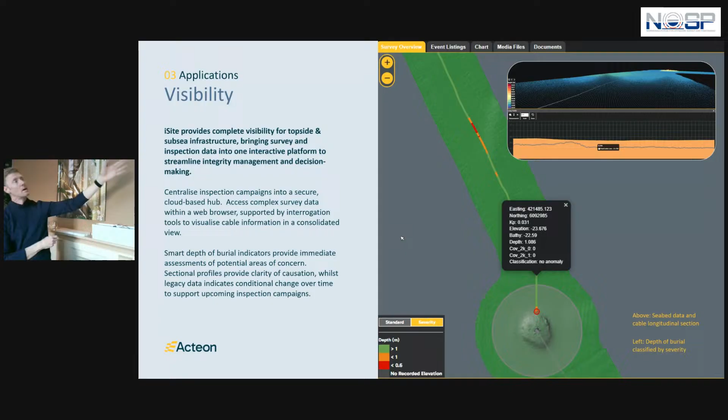So we've got the inter-array cable obviously below the seabed, although it's not easy to see that on this particular screen. We've decided to take a longitudinal cross-section through the cable in the same way that you would do with charting. This is almost like an interactive chart, and you can see there the profile of the cable, and where I've zoomed in.

Particularly to the left of that little black box there, you'll see that this is not a seabed issue. This is not a scour issue. The seabed is not eroding away. The cable's actually been installed probably wrong to start with. Either the trenches didn't go right, or they hit boulders or rocks or something. The 300mm cover that they've got here is actually to do with that.

So we have that information that's extremely useful. And then obviously when we survey that year on year, we can monitor and compare the multi-beam from one year to the multi-beam from the other year and see if scour is affecting things, obviously around the legs of the jacket, the offshore substation.

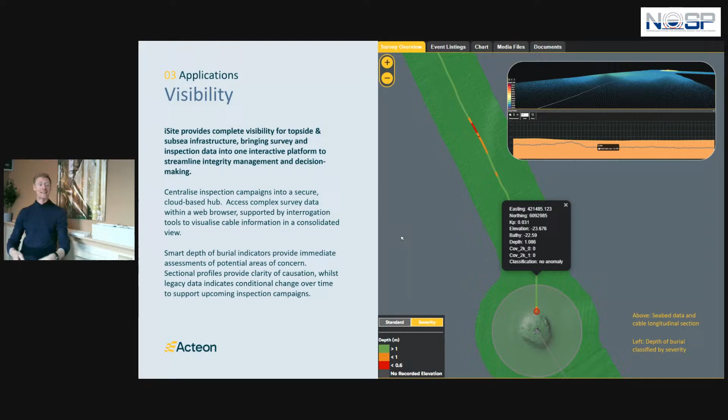We would expect to see scour around there. Hopefully the rock dumps are performing as they should be around the base of the monopiles, but you get to see all of that, and you don't get to see all that in a report as an end user. You just get to go in and look at it yourself, and that's the whole idea of what we're trying to do with the technology.

And then the media data, we talked about ROV data, and I'm not going to labour this too much because this does appear in my video, this very same example of a pipeline crossing.

But simply put, we want to be able to connect information together. The whole idea of a digital twin in its most simplest form is that you're going to have lots of data, listings, multi-beam data, videos - you're going to have all this information, and it's all separate, disparate, all on a hard drive in separate folders, and it's not connected in any way. All we're doing is connecting the dots together.

So if you want to have a look at a pipeline crossing in a specific area, all of the data is there for you to make that informed decision. You don't need to find which hard drive the ROV data is in and which of these 3-hour data sets you need to go to find what you're looking for. We're just driving the information and putting it together to make it far, far easier for you to find things.

And then it makes it easier with the reporting as well, because in the offshore wind example I gave you before, every 24 hours they're reporting back to us onshore just using Starlink on the ROV inspection campaign. We're pulling in data every 24 hours, feeding it directly into the system.

We're getting the media photography for the anomalies and things like that. And we're able to provide the client with immediate feedback to any red flags or any anomalies within 24 hours through the portal. So everything's basically being collated, QC'd, and then issued in near real time. And that's the beauty of using the cloud, as long as you've obviously got a half decent Starlink connection to do that.

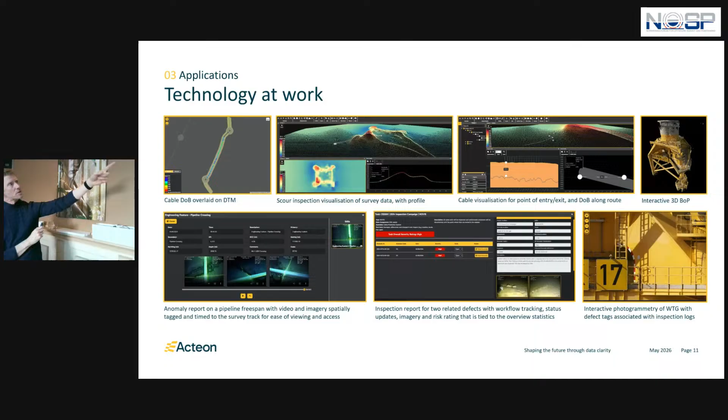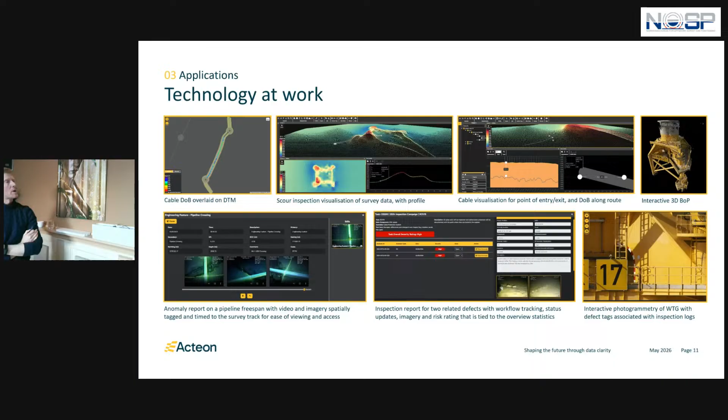I've got some examples here. Obviously, I've got the video file. As I say, we kind of operate above and below the waterline, and you can see examples there of cross sections we've done around the offshore substations and the jackets and various other things, and the above water of the jacket on the offshore wind from that point of view. So lots of ways we can use the technology when we're looking at the subsea application rather than the topside digital twin.

And then I have this video, doing okay for time, 5 minutes, and this is me. So what we've got here is GIS. I've got a construction support project off Brazil, and we get the entire field, so we can look at the entire field. This is a crazy ass field, FPSOs tied into massive pipelines.

Semi-traditionally, you have your folder structure of all of the data. So this is getting rid of the hard drive now. You can just go in, download whatever you want. That's all there. We're not going to get rid of that because contractually everyone's going to ask for that. We can't reinvent the wheel.

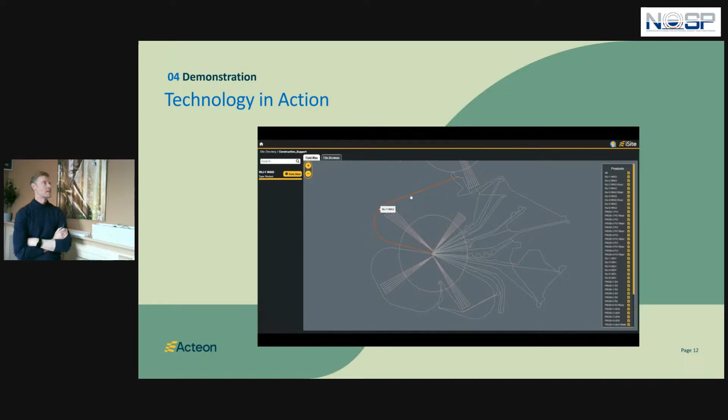But what we'd love to do is this, which is to say, well, let's have a look at this pipeline here, and let's have a look at it in more detail. What survey activities have been undertaken on this particular pipeline? So there's been 3 campaigns: pre-lay, as-laid, and as-built. We've got all that information in here.

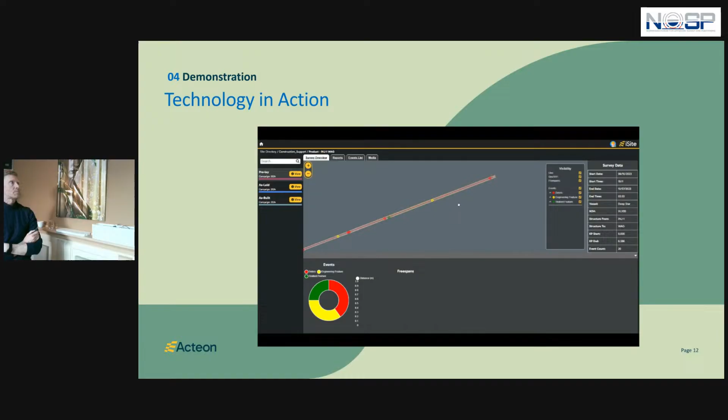We start on the pre-lay here. And what we'll do is we've got the multi-beam data, because this was a prelay multi-beam. So we've got the geotiff in this case of the survey route. We've got the design position of the pipeline, and we've got a few listings. The little dots basically are anything that we've hit in the listings.

So the reports are in here, so we can issue reports through the system as mentioned before. And then obviously the event listing. This is a small listing just because it was prelay. But it's all in here, and rather than being a spreadsheet, it's all interactive basically. So you can filter to all of your boulders if you want to, or any engineering features that you want to. It's just an interactive way of doing the same thing.

So by clicking on anything in the prelay, you get the data that you would normally get on your listings, but you also get the media files. In this case, it was static photography tied in to that particular event. So again, you're not hunting around for one thing, because one thing's connected to another.

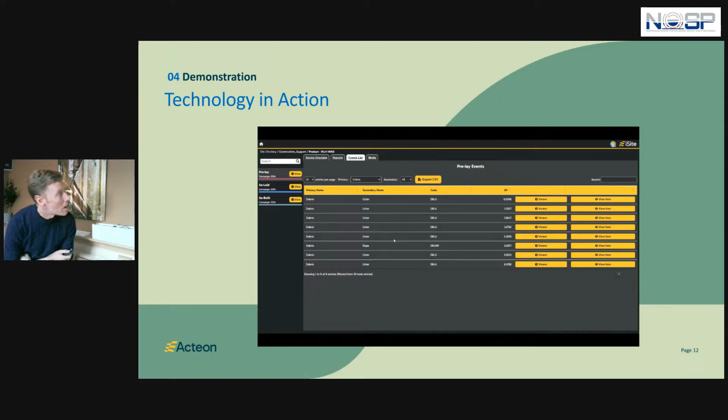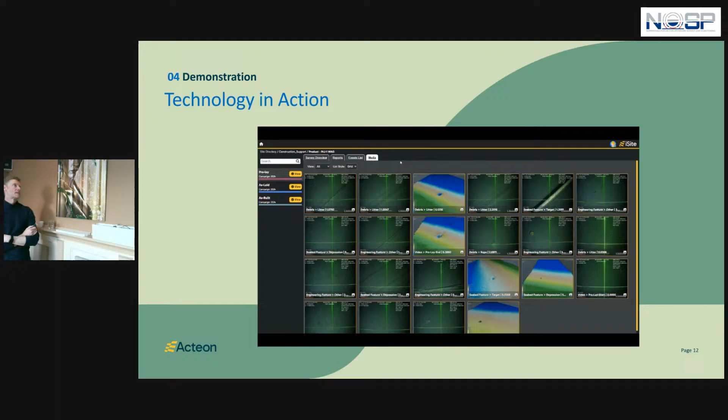And in this other example, I'm just filtering to debris and doing the same thing. So it just becomes this kind of nice interactive way of looking and connecting some data together, which is useful from that point of view. And in this case, as I say, all the stills are in the media folder that you can kind of click on as you wish.

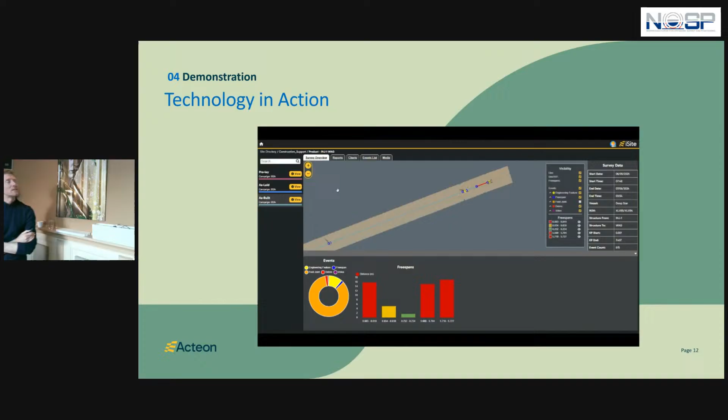A more interesting part of this data set is the as built. So you can see when it goes as built, things get a bit more exciting, because we get subsea structures, we get free spans, which is red there, as you can see going into the structure. We get pipeline crossings. So you can see there between the two blue dots, which is obviously free span start and free span end. We get pipeline crossing, which is the middle yellow one, as I'm highlighting there. You can see statistically we can show anything that we want.

When I go into the information on the pipeline crossing, this time we had ROV video. So as mentioned before, I hit play and I'm already teed up on the video, 3 channels, just playing the pipeline crossing, ready to go from that point of view. So again, it's just about bringing the information together and making it far more accessible from that point of view.

This is a complete screen record of what I did. This is real time on the cloud. There's no kind of speeding up or anything like that. And we've got a bit of a dodgy connection in the office at the moment. You can kind of scrub through. It's just there. The information is there, and you can kind of then decide to kind of replay it back and go back to where you started.

It's just driving informed decisions, and the feedback that we're getting from the operators is that they want to see more information where they can compare data over time. As I say, bring in the multi-beam from one year and another year and look at how that looks, or if they want to tie into their anomaly systems, their management systems for the anomalies, bring that data in, see how that correlates, see how that helps them plan the next campaign for the next year.

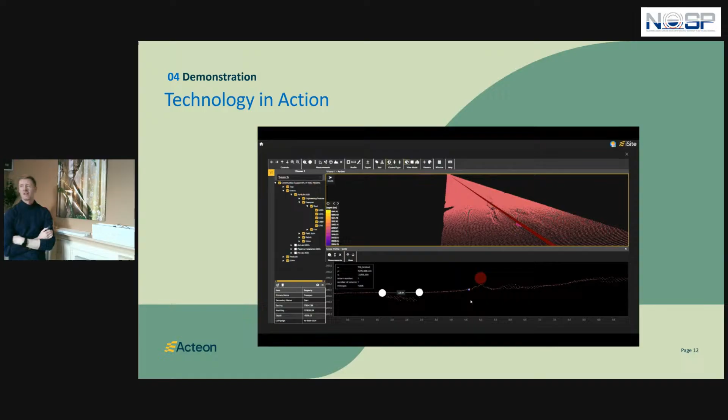But this is all done in the internet browser through Microsoft Edge or whatever you want, so we're not talking specialist software, and that's the key to what we're trying to do here. We're just trying to make the data accessible to all from that point of view.

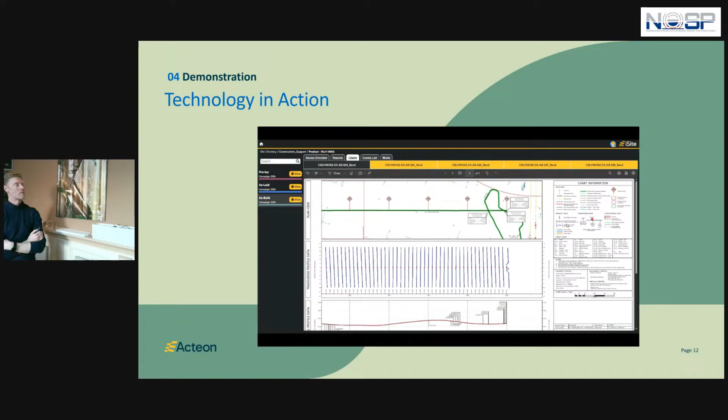So I think that covers off most of the data here. I'm going to show you reports which you've already seen. All the charts are in here, so there's nothing that isn't in here. It's just a different way of displaying the information, I guess, from that point of view.

The event listings are obviously more complicated because there's a lot more of them, but that makes no difference. And then the media files, you can toggle between still images and video files. You're just back to choosing the video file if you knew which one you were looking for, and you can find it, scrub along, and do it the old way from that point of view. There's no problem with that.

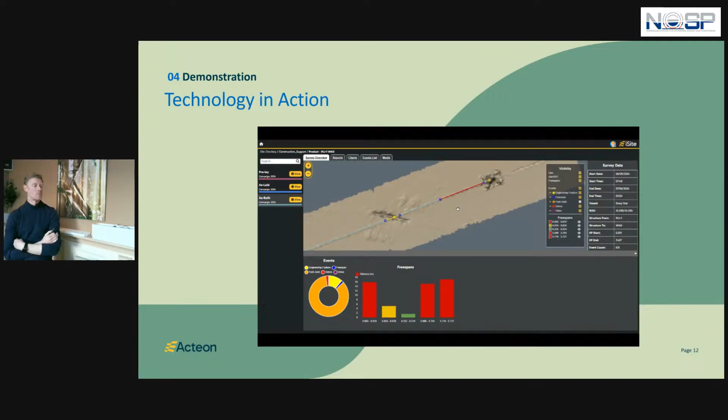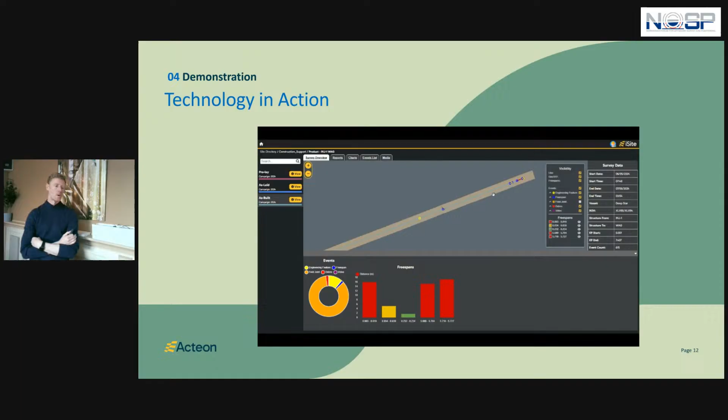I think it's interesting. As I say, we're working with a few operators on the subsea side of things at the moment, because a lot of the data they're managing is database driven. It's not visual, if you know what I mean. So they're using the reports and the listings to understand if free spans are getting worse year to year, and if that's exceeding engineering tolerances.

But they're more interested now in looking at what is the effect of scour, and what three-dimensional view can I take on this. The technology there and the quotes are obviously more on the top side than subsea, but it obviously works, if you know where your data is to start with, and you don't need to capture it again or retrieve it, because that costs a huge amount of money, never mind anything in between. But apart from that, that's really what we're trying to do here at Acteon with our iSite technology.

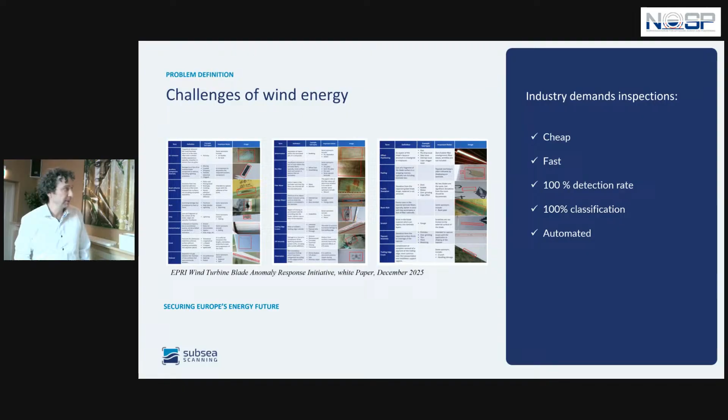We at Subsea Scanning believe that no single sensor could answer this call, so we decided to combine various sensors to achieve that. We believe most of all in optical sensors because they are non-destructive, very fast, and very accurate. You have a high potential for optimization, and if you use different types of cameras, you can digitize different types of material properties. So if need be, we can deliver real-time results.

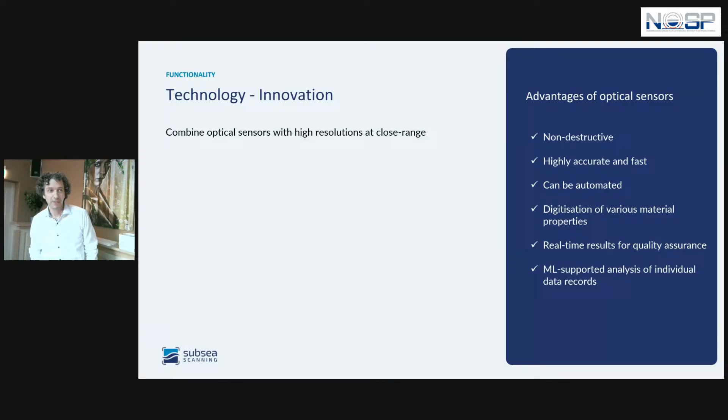And of course, machine learning supports very well image analysis. That's nothing new. We'll see if we get there. So we do what everybody would probably start with.

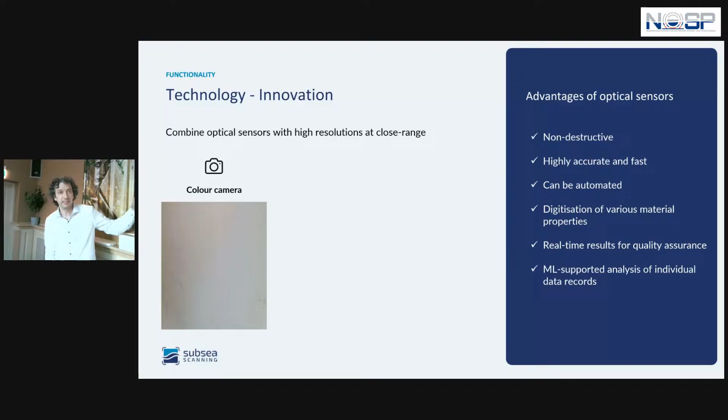We take a color image. We take a drone, fly quite close to these rotor blades, about 3 meters distance, and take high resolution images. As you can see in this example, this is actually a specimen I had in my office, 80 by 60 centimeters in size, just a small fraction of a rotor blade. As you can see, there's not so much to see, so just a color camera can't be a proper response to this call.

So we decided to employ also thermal imaging. This is the same specimen, the same site. We've heated it for a few minutes and then took a thermal image from close range. And you can see, that gives us a completely different picture, right? We can actually see the heat dissipation. We can see what's going on in the underlying structure.

So, entirely different scenario. Last but not least, and this is where most of our time and efforts go to, is 3D scanning. You can see here a 3D point cloud of the same specimen. I can play this so you get a better impression. The 3D scanner, the one you're seeing down here, delivers a point resolution or point distance of 1 millimeter, so every millimeter on that specimen gives you a single 3D point.

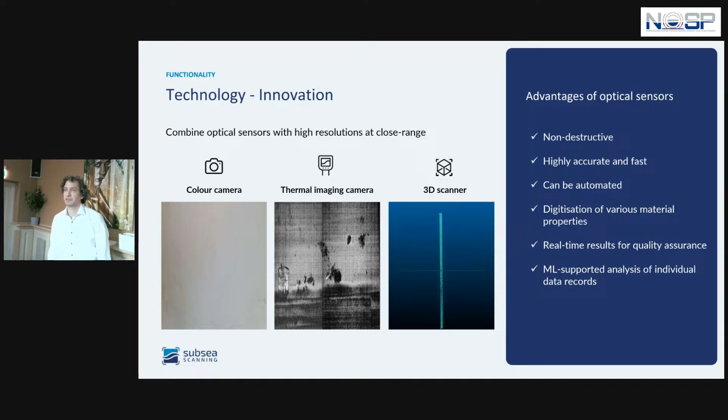And the magic really starts on the next slide, achieved by getting this data in a synchronous way. So we have a geometric overlap, and all 3 data sets are aligned and correctly scaled. We achieve that through co-registration during the calibration process. At the bottom, we have this 3D point cloud, and then we map the colors and the thermal data on top of it.

And now we're talking. Now, all of a sudden, we have the correct geometry and correct scaling, and what happens is that these defects lie on top of each other, and you can actually analyze this triple data set across thermal, RGB, and 3D point cloud. This gives us new ways to classify and validate our classification results. You have a hotspot somewhere, and then you check all 3 data sets at the exact same position and location, and see if there's something suspicious in the thermal data. What does the geometry say? What does the point cloud say at this area? What does the RGB say? So this helps us a lot.

The field of view we cover is about 1 square meter from a 3 meter distance we are recording, and I already mentioned 1 millimeter point distance. The type of scanner we have built and designed is based on a concept called stereophotogrammetry.

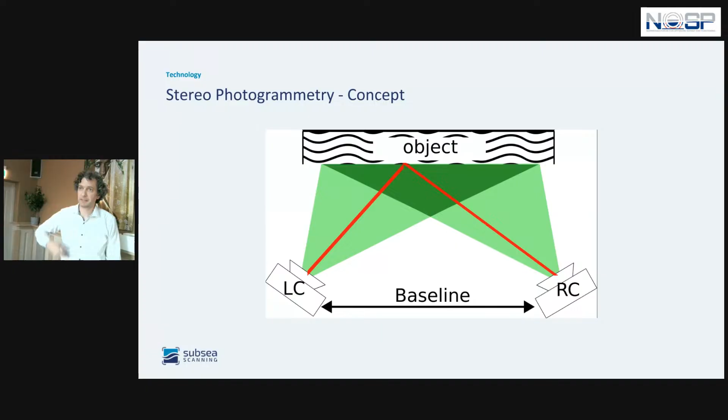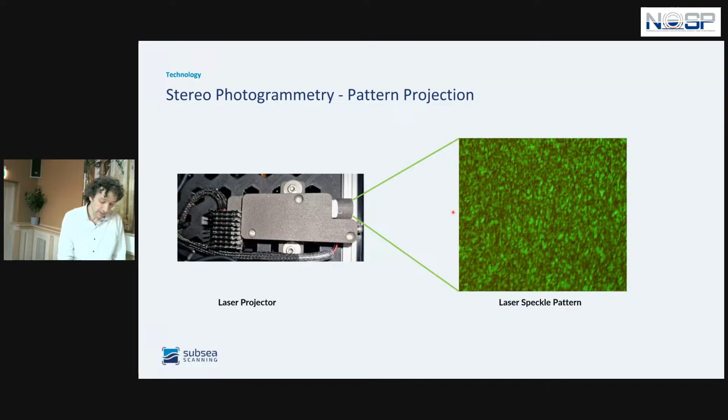Yeah, some people are still nodding. Good enough. Okay, and that helps us how? Well, it helps us because we don't have to pick any more from a million potential corresponding candidates. We only have to pick from about 1,000 potential candidates, because we know the correspondence is on the same height, right? That limits our search window drastically.

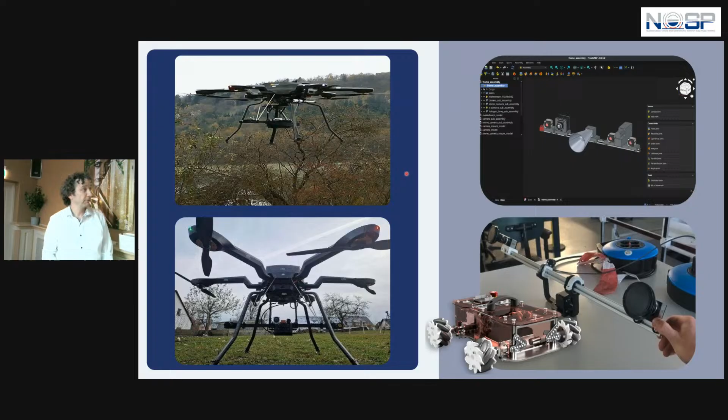This project phase is actually co-financed by Rogaland Fylkeskommune. We are very grateful for their contribution. Our scope is basically to build a new sensor housing, which we just have. The sensor can now be battery powered.

We have developed a new calibration board for the thermal camera, and we are just kicking off a new development for a new projector, which is even brighter and allows us to scan faster. This one here can scan about 10 times per second, which causes about 1 terabyte of data within 10 minutes.

When it comes to software development, we are a tiny bit behind schedule, but we are currently automating data storage and automating data processing. Obviously, with 1 terabyte in 10 minutes, you don't want to do that manually. You need a fully automated pipeline, down to visualizing the point cloud also on the web.

Next steps will be a machine learning-based parameterization of the sensor, so we don't have a field operator anymore who manually checks that the cameras are working and makes sure the exposure time is correct. This shall be handled by an online model, basically.

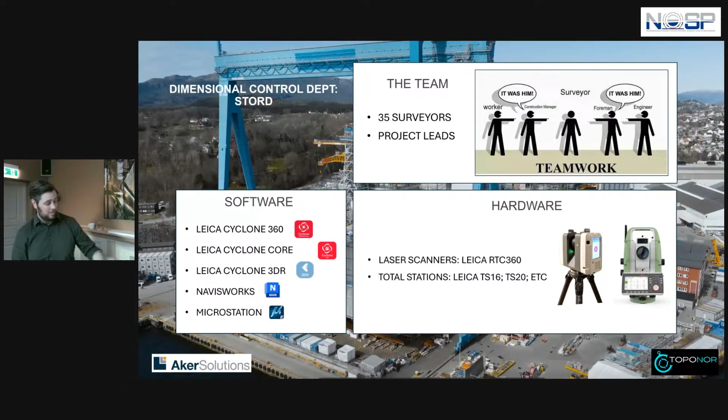A little bit on the yard itself. On the left here you see Hugin A, and this small tiny bit on the right side there you have Valhall. On Stord we have around 10,000 people right now, so it's a big company with a lot happening - a lot of people, a lot of disciplines to take care of, and a lot of challenges for us surveyors, as all of you probably know a little bit.

Then we have another picture on sail away of Fenris topside and the Hugin B jacket. Yes, I took that from the internet, you can just skip that part.

So the topside is supposed to weigh around 27,900 tons. Overall it's 142 meters, the length of the mainframe is 90 meters, the height of the platform is 55 meters, the firewall is 45, and overall width 70 meters excluding flare.

Main assembly yard is Aker Solutions Stord, but we had different companies or different yards in Poland, Finland, Dubai, Sandnessjøen, Egersund, Verdal, a lot of places in the world. And it's my job to try to get every piece to fit together - that's a really big challenge.

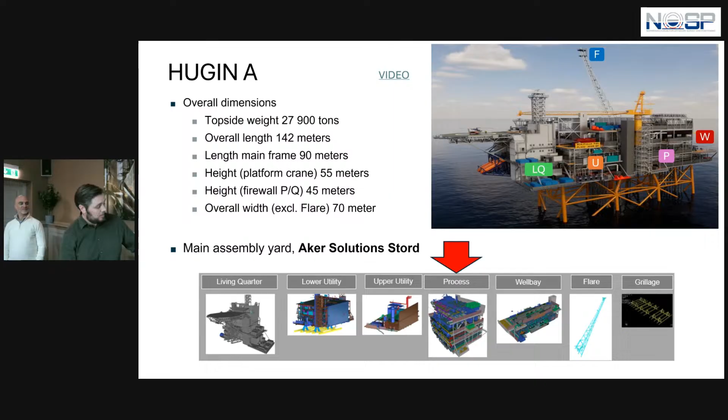So we start with the process - that's been kind of the main focus on Stord itself. A little bit on the way the platform is divided into modules, and I would say around 3 times this room for each and every module.

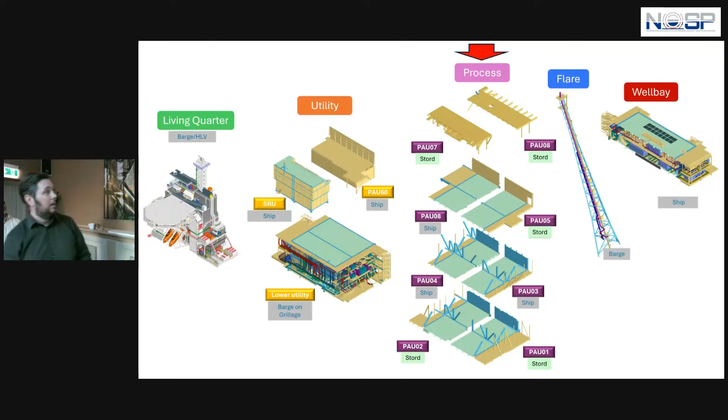Then we have all these other parts - lower utility, that was on Egersund. SRU, that was actually in Batam, Indonesia. Wellbay was in Dubai. Then we have PAU60, that was in Poland. PAU 4 and 3 and 8 was in Poland. Then we have the living quarter, that was in Leirvik, nearby us actually. And then we have the flare in Sandnessjøen, of course.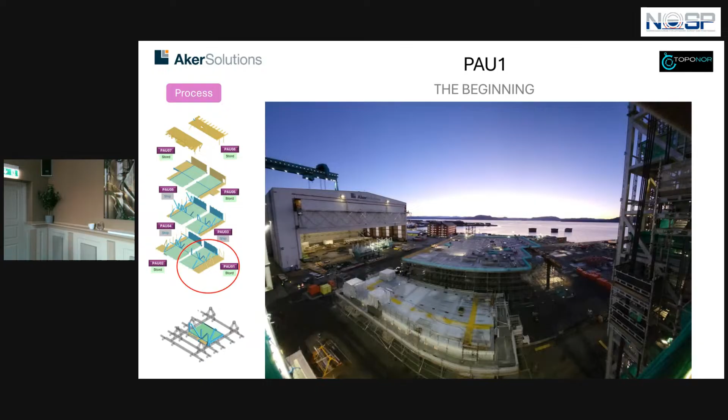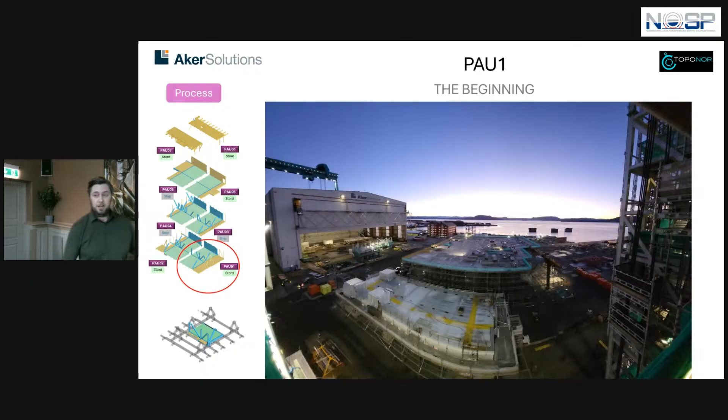So what you see here, let me just walk over - this is the area where we're going to place the hooking rig. This is something else - we did a scan of the scaffold itself to check for clashes, to see if everything was ready. Didn't think I would find much, but we actually did find something - there were some small pallets, so it was easy to remove.

This is a kind of simulation we use in between the poles. So after lifting PAU1, that was in place, we had PAU2 just on the side. This was actually PAU3 on top of PAU1 - it was a simulation, scan versus scan, and we used the scan to create this kind of simulation between it, then of course did a clash check. My big challenge is we have a huge scope.

We have pipers, we have welders, we have insulation, we have painters and everything. Everyone is building each and everyone's scaffold, putting up tents, putting up stuff together, everything. And I have to deal with everything.

Then I get one date - okay, that's the day we are going to lift. Okay, when will I be able to go under to scan it? One day before. No, I need at least 5 days, I said the first time. Sorry, we cannot do that, you will have 2 days. Can I at least have 3 days? No, you have 2 days.

So that was basically the standard for us. You have to do the full clash check, the simulation and everything. So you have to capture the data, work around the piping, work around the scaffolds, work around the painters. You have to get all the scaffold removed and everything, and then do the full simulation and the full clash check.

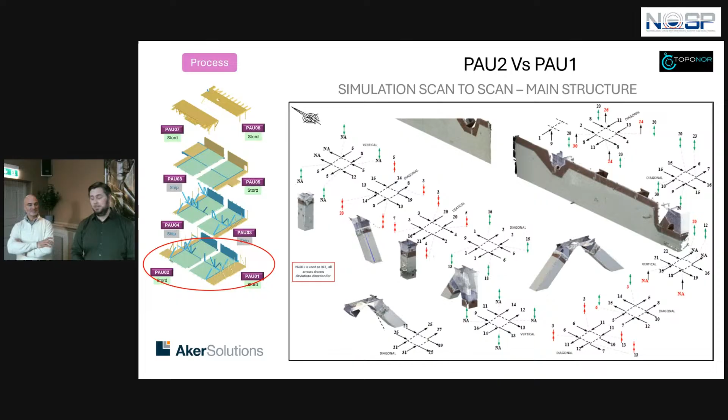That's a really hard task to do, it demands a lot of planning. That's where Ricardo was my wingman on this one, because I needed to plan - okay, what do we need removed? How can we do this? So that was kind of my big job, to figure out what I need to be able to do this task. Then I get Ricardo to do the actual task, together with me and another team, of course.

So just another example of a simulation that we did, and this is how it looks. Up in the top here, you see the underside of one PAU, full of supports, full of pipes, sometimes scaffold hanging with it. And then you have the top side, and you're going to thread that down to this somehow. So you have a lot of scans, a lot of things you have to deal with, a lot of things you have to detect before you have to be there with the lifters.

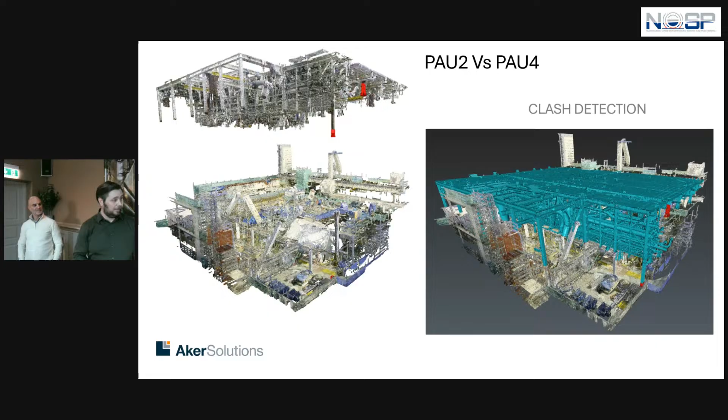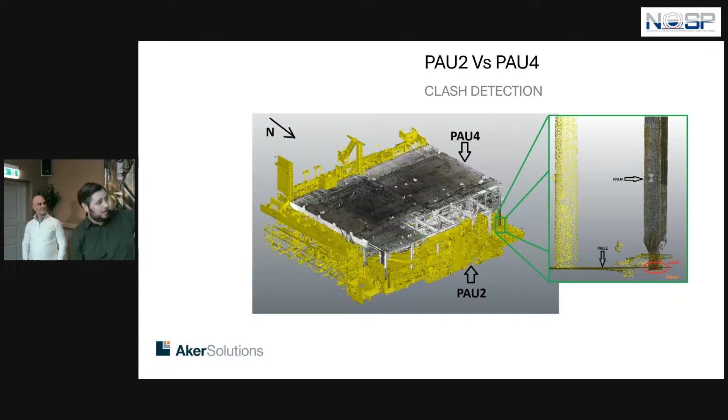That's why we have 2 days, and the welders that are going to cut everything are running all night long before the lifting. This was PAU4 on PAU2, and this is an example of the clashes that we found - for instance, a beam sticking down there. And I'll run through a little bit more.

On the lifting, everything was evenly supported, so everything was good while we built it. But when we lift it, how will it look? When we drop it down, how will it look? It will probably be different, right? So we need to figure out, okay, how does it look? And then we have to try to estimate, will this actually fit or will it not?

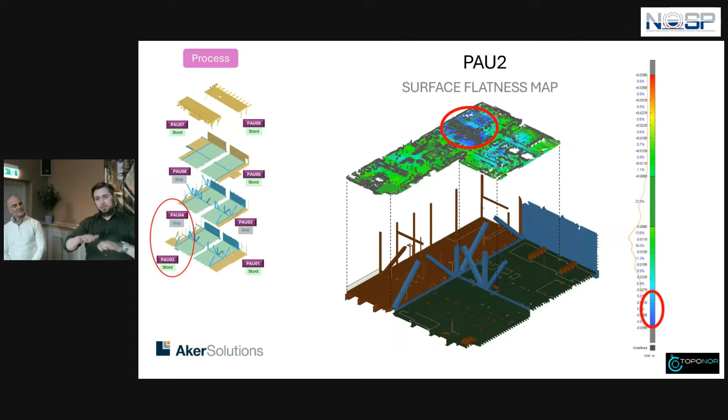And do we expect some clashes there? Especially on the wing decks, the red part there, that was just falling off. So, yeah, and they believe everything is straight. It's still, of course, it's straight - no, it's steel, and it's heavy, it goes down. And then you see in the middle, on the flatness map, you see that it's different all the way. The walls and everything, you have small gaps in the middle, like so.

Nothing is even. Yeah, if I can add there, just so you guys understand the size of this - every single element of that weighs between 400 to 500 tons, right? So when you start packing up this to build a platform, the floor and the whole thing starts to sink down, right?

Then we have to, in addition to check the position and to check the clashes, what they're gonna have when they lift it down, we also have to check what's gonna happen after it's lifted down. So that's a quick evaluation to see the floor after the lowering down.

This was actually PAU4 versus PAU3, and PAU4.

Yeah, it depends on what was the reason they asked for it specifically. So in this one, I think they believed the wing decks are falling down a little bit, so we believed the pipes will not fit as it is drawn in the model. So then we can show them, okay, the whole floor is a little bit down, which means you have a support, almost like this tripod, and the pipes are going on top of that one.

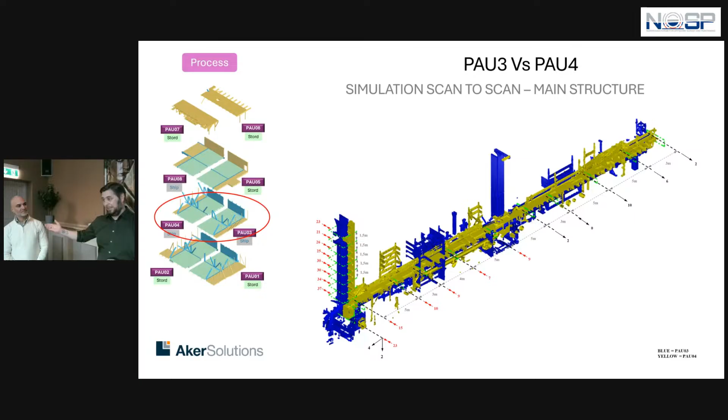I need to mention the red arrows. It's okay, not a bad thing, because some of the section is delivered with overlay. Yeah, so it's quite normal.

Some kind of overlay, maybe. You never know. In this case, we had some temporary beams that were supposed to support the whole bow up when we lifted it up. And then we saw on the bottom, it was a little bit sticking down. So that was one kind of clash.

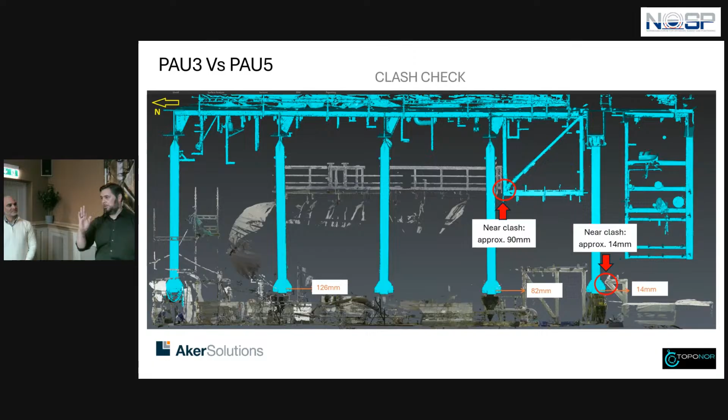And this was a little bit moved because it's hanging on one small thin plate, so it was dangling like this basically. During the lifting, you saw the beam was standing like this. So we discovered that this does not look good, but we can move it, so that's good. But the clash on the bottom, that one we needed to remove, so that one was cut.

This is just an example. Here we have another example on the simulation itself.

And then, how can we give a good view on where the guys can find the clashes? I had one idea, Ricardo had his idea, and we worked with someone on the method. They had their idea. This was kind of my way of trying to solve that one. So I will go over and explain.

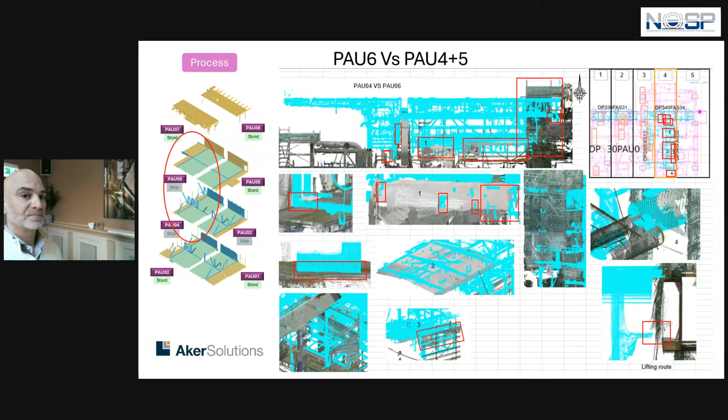So I divide the whole section, this is from top view, into 5 zones. Right now I'm working in zone 4. Then I take a front view of it, and I mark the elevations and the location with a number, and I put the number here. So I show the actual clash and the number so they can locate it both in top view and in front view. That way, I think you can easily find, okay, I need to go exactly there.

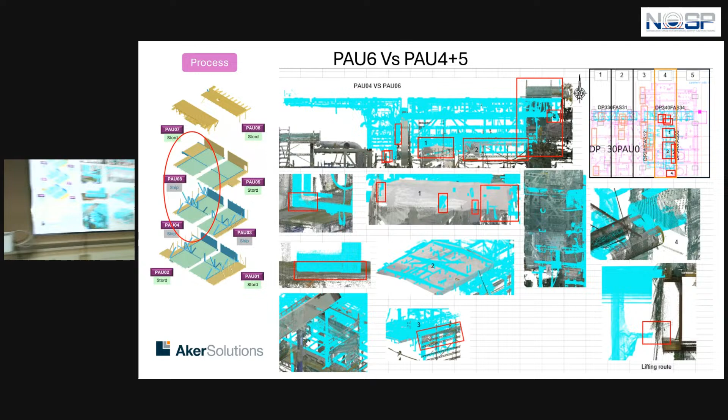Quicker to actually find the thing that is clashing and cut it. That was just one way to do it. But we had to work together, all 3 of us, and put in everything together.

So when I was done with the simulation, I also worked with the clash check. That's kind of the things we can find in the clash check. Here's an example: it was a support on a tank. If you just put this one down, then the tank's isolation was penetrated, so we could not have that support there. That's what this clash check is showing.

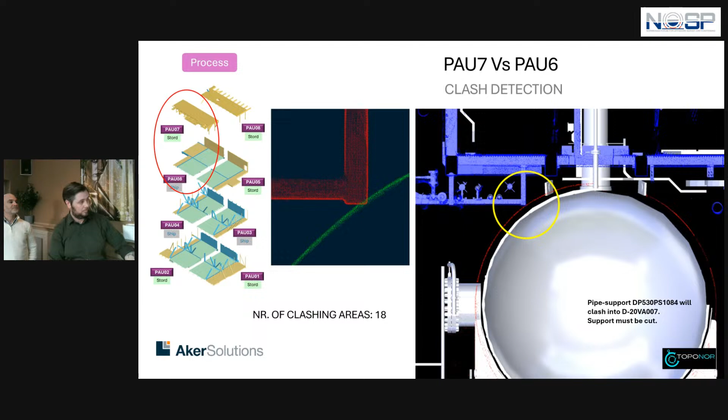By the way, a detail on that - could you go back, maybe? The number of clashing areas is 18 in this specific example. So what we show is just one example, so you understand what a clash is. But for each area, we would find between 5 to 20 clashes.

And if we don't do this work up front, the typical situation in these big constructions is that the crane lifts these 600-700 ton masses, and they go down until it hits something. Then it has to stay there while guys try to cut stuff, spending hours and even days. This delays the project - you have thousands and thousands of people on hold waiting for this to be resolved, on hold with the crane, which cannot do anything else because it has 700 tons, and the crane is very expensive.

And Valhall is probably waiting for this section to go down so they can start on their lift. So then you are actually affecting Valhall as well, which is why it was so important to actually reach those demands and reach those dates.

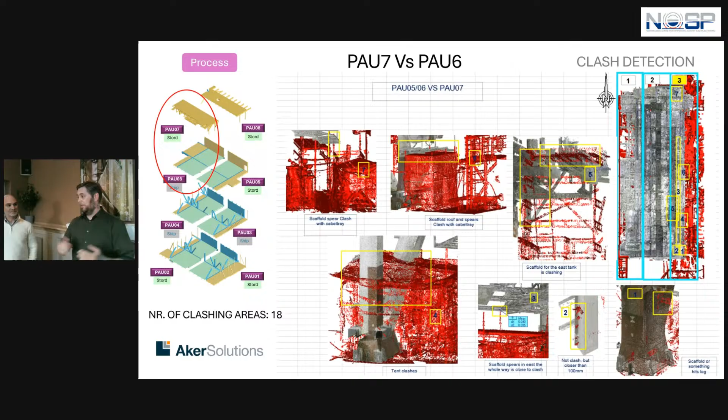You see that everything is built around where the colored one is coming down in the middle here. You have a big support coming down, and you see there is a lot of stuff here. If I don't recall wrong, this was 10 hours before the lifting - that's how close to the lifting we were delivering that one. They have to run up there and remove everything, so it's a quick one.

Then I think it's your turn. Is it my turn? Okay.

We're going to pass through here quickly since it's more or less a repetition of before - the different types of elements clashing with scaffolding, cable trays, things that aren't in the design. It was a lot of learning for everyone to see that when you engineer something, things aren't always exactly as designed, and this is why issues like that happen.

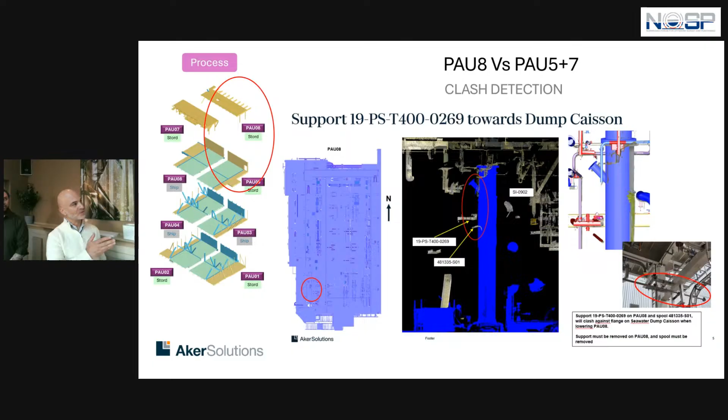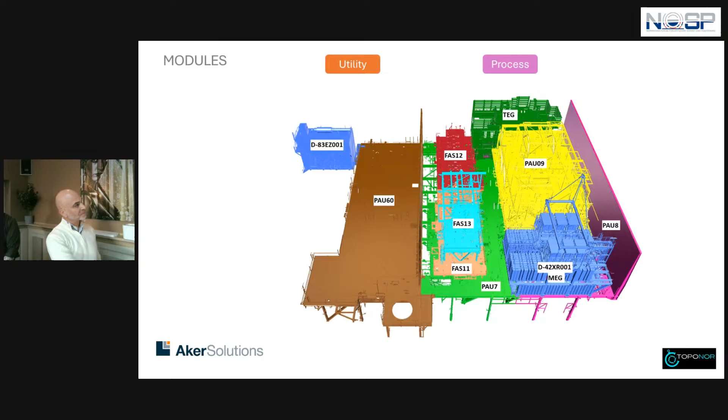So we've been through all the process area, all the way to the top. These are also huge elements, all of them, at the top of the processing area.

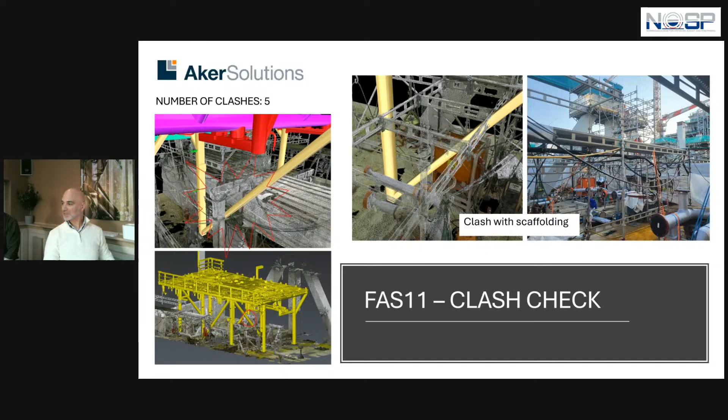This is a typical scenario: you have scaffolding all over the place, and they tear it down just a few hours before. So we have to scan everything with the scaffolding still there and then remove it from the point cloud most of the time.

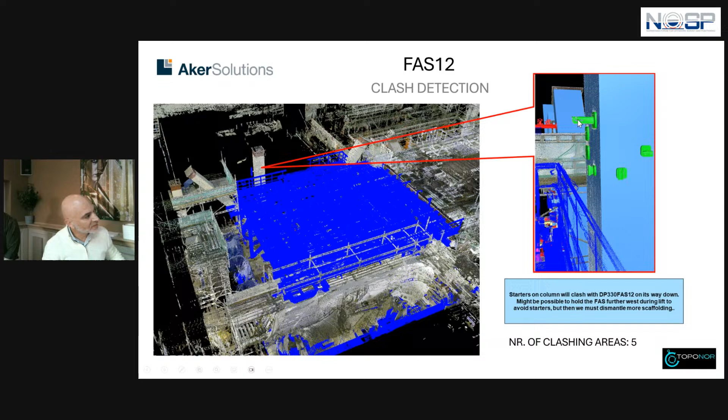More examples of things clashing. Here you have some brackets on the walls - it was stopping the crane from going down.

We also discovered that using laser scanning for simulations helped not just with clash detection, but also with maneuvering the crane. Sometimes they had to grab the whole structure, massive, lower it down, and then maneuver the module into position and rotate it. We did this kind of simulation to make sure the maneuvering could happen without clashing.

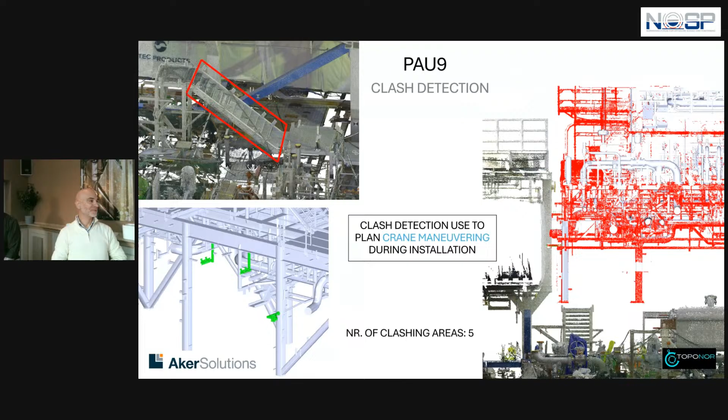And most of the time it wasn't clear, so there were always things to cut beforehand. Some more clashes - I think almost every single element had clashes.

Okay, so we are done with the well bay and process area and moving forward. No wait, this is the well bay now.

Here we also used laser scanning for checking the connections. I'll go through this a bit to explain - this is typically done with total station because it's accurate and fast. We did this with both total station and laser scanner because the profiles are very particular - these are called box girders, you see a picture here.

What's important when you build a platform is that these massive beams, these box girders, connect very well with each other. As you can see in this report, around 15 millimeters is out of tolerance, while 4, 5, 6 millimeters is within tolerance to connect all these massive joints together. So you have, say, 3 here and 3 on the other side.

We did this scanning with high precision laser scanning, which of course takes a lot longer than fast scanning. But we could see with more certainty that everything would connect correctly. And additionally, we could simulate how to maneuver the element into place, which would be more difficult to do with traditional total station measurements.

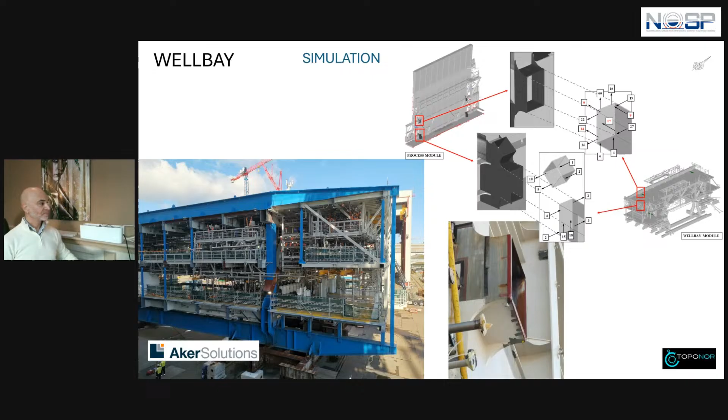It's just actually trailing, not lifting - we used trailers to drive it into position. That's pretty fun. Yes, that's right. Same with the living quarters that we'll see after.

So this was the utility module - as you can see, this is a massive module. This was built at Aker Solutions in Egersund. It came as one package on this boat.

The mission here was to connect this yellow part to this green part within a few millimeters - to understand the size of this, that was crazy.

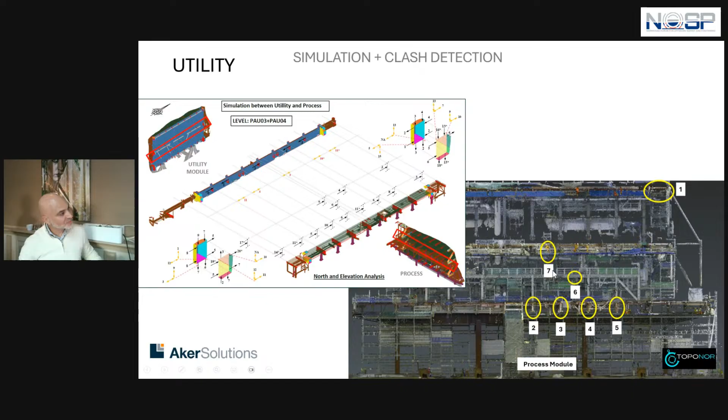It wasn't so bad - the results were more or less 5 to 6 millimeters, so things were done quite well in Egersund. A few clashes here - not 18, but up to 7-8 clashes that we found. So this was very successful.

This is another PAU on top - this one has, I think, 700 tons, so it's one of the biggest that we have, if I'm not mistaken. This was actually 1,000 tons. 1,000 tons, yeah, thank you.

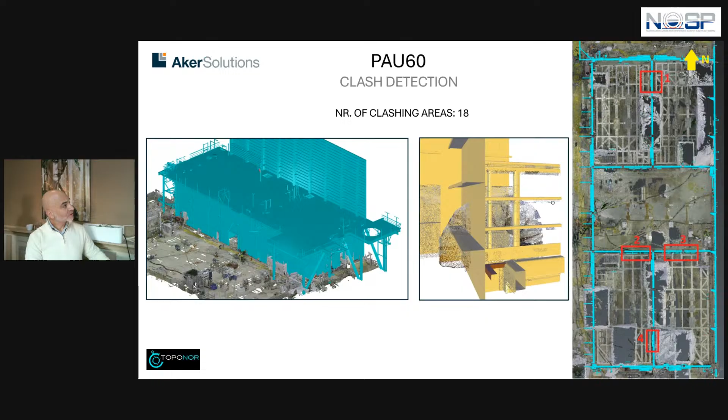I think this one got 18 clashes, so it almost reached the record for clashes that had to be cut and removed.

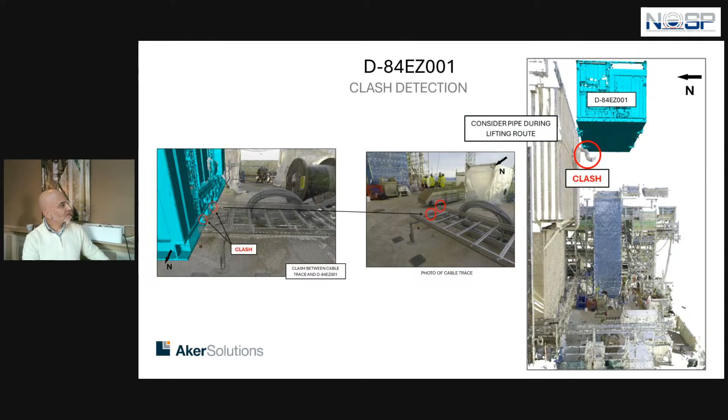These are all the small units with clashes. The other one, small SRU, south-north, also had near clashes. Another small element with clashes, and then came the living quarters as one of the last elements - that was built just next to us in Leirvik. You can see again how massive these units are.

On the right side is living quarters, left side is the utility. And this was like this for us to scan. So you can imagine we can't scan with scaffolding and with tents, and nothing could be open for us.

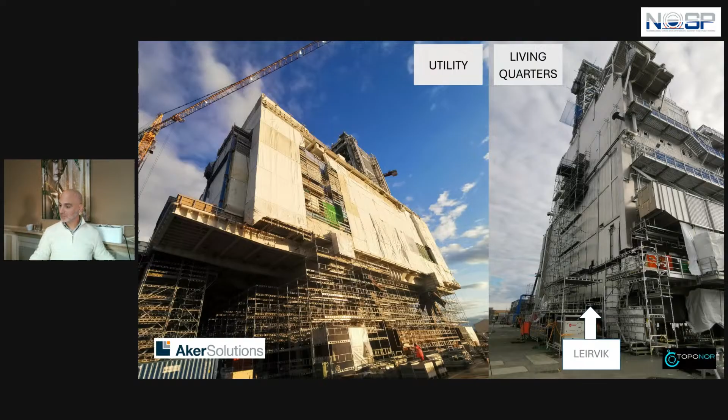And the precision here was again back to 2-3 millimeters. So on this particular part, we were brave enough to do everything with laser scanning, and almost kept the total station measurements to high precision laser scanning.

There, on aluminium actually. And that's also a challenge with laser scanning on the aluminium - it gives us some bad reflections often, and everything.

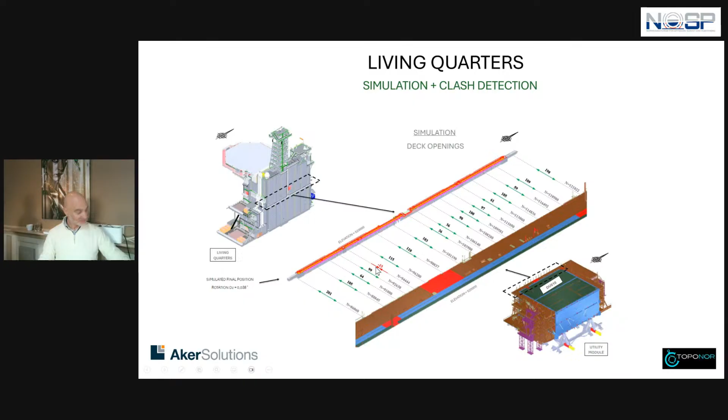Yes, we found clashes, of course, not much, a few clashes. And we also, it was interesting because they also used the laser scan to fabricate actually the shims that they needed to connect.

Right, so this is the module of the living quarter. You have 4 hooking points, 1, 2, 3, 4. On top you have these hammers, right? It's like these hammers - it's going to connect like this.

And then we're doing high precision laser scanning, and we found out that, for example, in this case, they needed 12 millimeters for shims, and on this side, they needed around 20 millimeters for shims. So it is extremely high accuracy that was used. This is just one example on one corner. We did this for everything.

Here, the good thing was we actually used the laser scannings to simulate entirely how the living quarter is going to connect to the utility module.

So there was a lot of discussions that the living quarter had to tilt a little bit forward, 3.5 degrees, or should be 3.8, I'm not sure. But the thing was, when we actually had to do the installation, the guys from construction went, okay, let's go for it, let's just do it. And when we were about to connect the modules, I asked, by the way, are you using 3.5 or? And then one of the guys looks at you, yeah, you were the one in the meeting, they told you something, I can't really remember. Let's just go, it's almost time for dinner.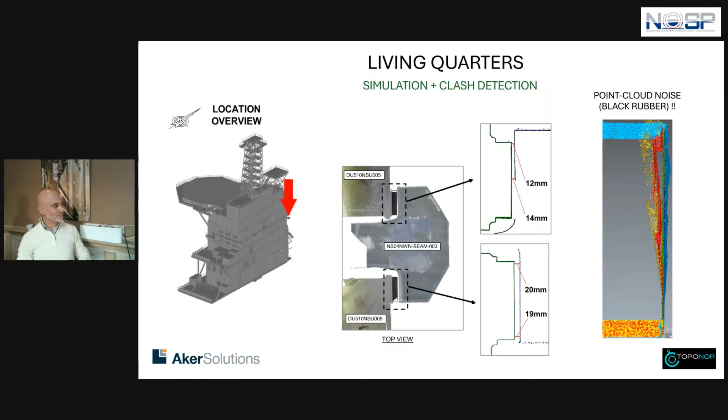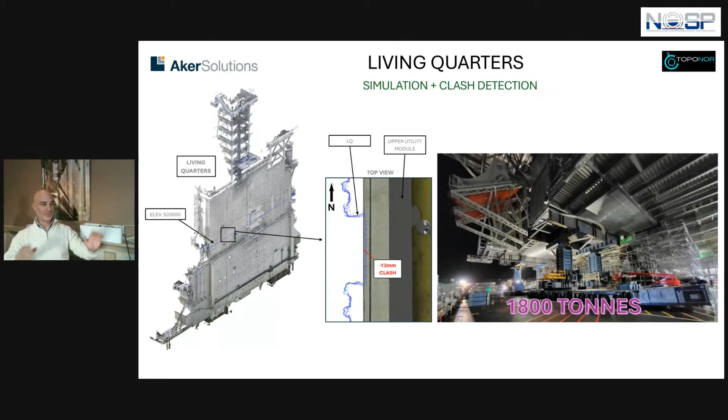And so you can see here, the massive amount of this was around 1,800 tons that this module had to be lifted up and connected. And you can see here again one of the examples: the cladding, the protection layer, was in the model in one position, and the reality was like 20 millimeters outside. So if they would not have used the scans, they would go in and break the whole thing apart. That's why it was very good to do laser scanning up front.

So they actually cut all these parts before. Yes, one more - there is the flare still, I think. So it's not completed yet, this big project. There are a few more elements to go. One is the flare, and there is some stairs and small stuff. Compared to what we have been through, it's small stuff.

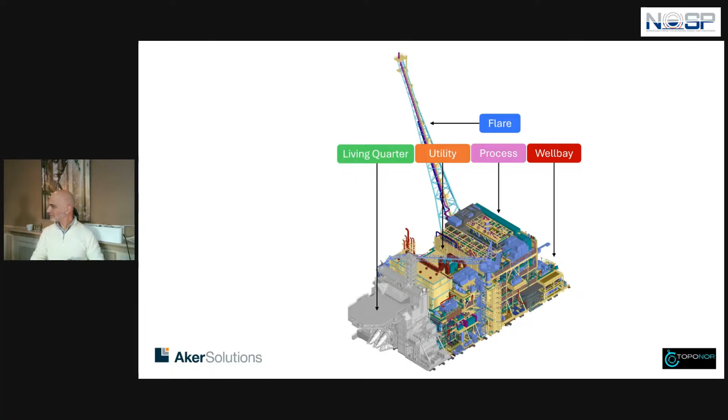Intensity map - yes, there you have another example of where we use the intensity map. So we use the scans for the simulation, connect positioning. We use the scans for clash checking. And we also use the scans here for intensity map.

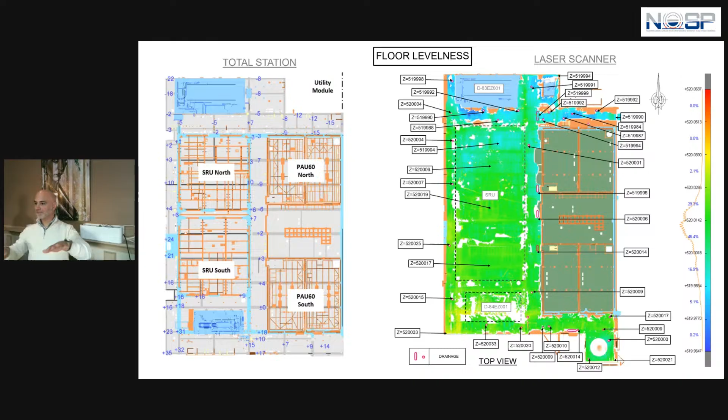And in this example, our customer wanted to know how the water will flow when it rains a lot. Because of all these modules on top of each other, they tend to make some ovality, and water stays there. So we want to know, is the water flowing in the right directions? Do we have some drainage maps here?

So now we can see, in this case, we were lucky, that was within 4 or 5 millimeters of precision, so the water was flowing very good. So the case here is HSE - if the water freezes and you have an emergency and you have to run away, what will happen if the water is staying in the runway path? So that's the basic case of this one, and that's one case where they asked us to do this kind of measurements and presentations.

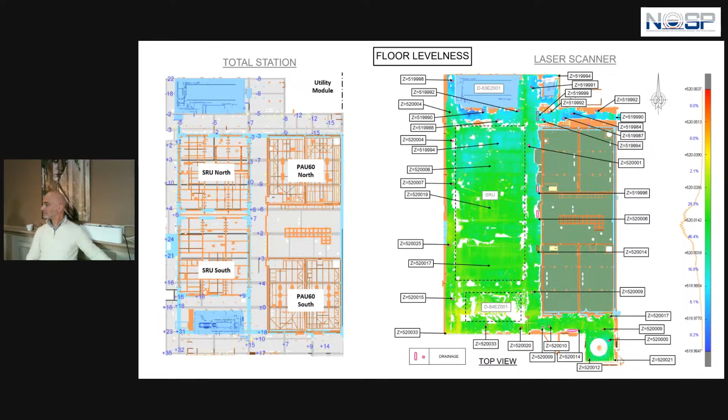Exactly, so traditionally we would do something like on the left side - it's done with the total station. You measure points on the ground here and there, you get some elevations, and with the laser scanner, you have a full picture of flatness of the surface in the floor in this case. We will also get another example on where we're going to use the intensity map soon.

A lot of planning, that's how it is. And that's why I'm thinking a drone is a really good tool, maybe we can use that in the future. Because then we'd be quite sure that we capture well enough, as long as we have good enough accuracy on it. But we moved around and scanned everything up here, and these pieces are higher than ourselves in many cases, so you have to move around to cover all the angles and everything.

Yes, you forgot the detail. There were 4 elements just before Christmas. The worst time was around the 16th of December, that week.

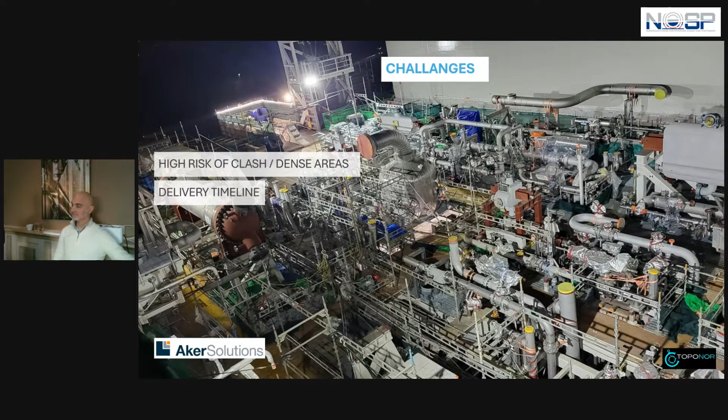So we did a scan when it was prefabricated, checked it to the design, that looked good. They shipped it to us and they came to Stord. Then you have placed up like 5 to 6 pipe racks around, and you're putting the pole on top of that one. So you need to do a full scan again on the pipe racks, right?

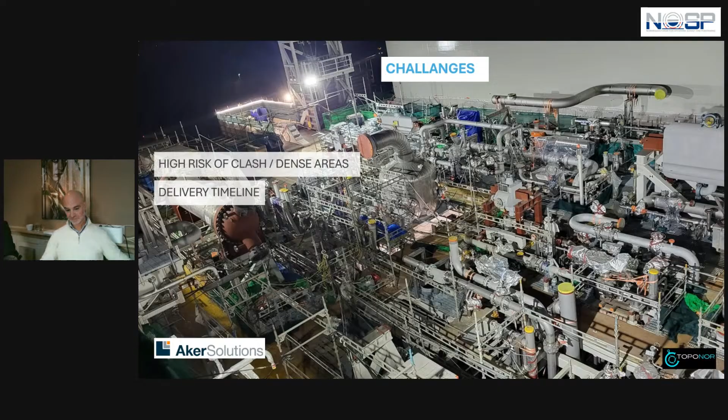Sure, and then you're welding on the pipe racks, and then you are installing full pipes. So you have to scan it before you lift it onto the model. So yes and no—we did it, and that was not enough because we installed so much before we lifted it. So yes and no on that one.

Yeah, and sometimes when we scan other locations, we know that when things are transported, there is, depending on the case, most of the time a deviation. I appreciate the installation part, but I'm thinking perhaps if you'd found deviations from the design model to the as-built prior to departure, that could have been fixed before bringing it. Definitely. Like the SRUs—they were scanned before, and we know this is a block, this is not going to move.

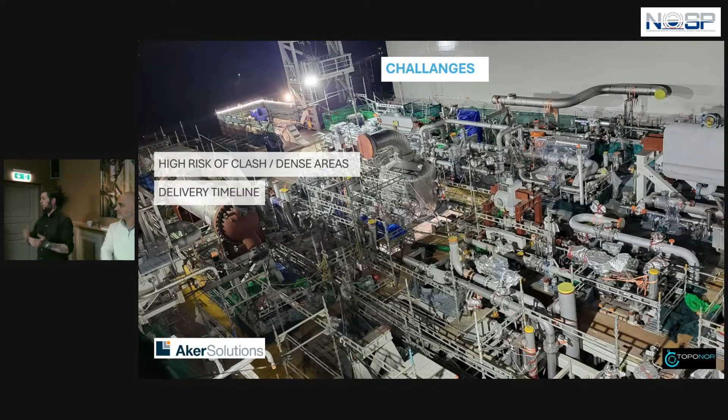So we scanned it, and we were very grateful we already had this done, so it doesn't come on us. Just to clarify, we had verifications of all the posts where they were produced before they shipped. We did have a verification against the design model and everything, and we also did scans on most of them. But once they are hanging, right—once the crane hangs and the whole thing goes like this, yeah.

Very good. So coordination—like you mentioned, there's a lot of disciplines when you're offshore in the rig, and you have to speak with the leaders. Like you said, it was 10,000 people working at Valhall, Hugin. This is like a corridor in a shopping mall on Saturday, so it's a lot to coordinate with the leaders. And the temporary objects—like I said, this is an actual case where we have to scan things like this, totally full, and we have to go around. Of course, this all moves, and when you scan, nothing can move.

So in this case specifically, we started scanning from the top and went level by level down. It was a coordination challenge because they were going to install the pipes up until the day they were going to drive it in. So the unit was supposed to drive in, but they wanted to work until that day. How can we solve that? We need to scan as soon as they are installing, and they're going to remove from the top down. So, okay, we have zones.

So it was some coordination with all the disciplines, at least 10 minutes every day—when are you ready with everything there? Good, we can come in, capture the data, add it to the model and process it. Then the next morning: what's ready today, what's going to happen today, right? And then you basically work through the whole section.

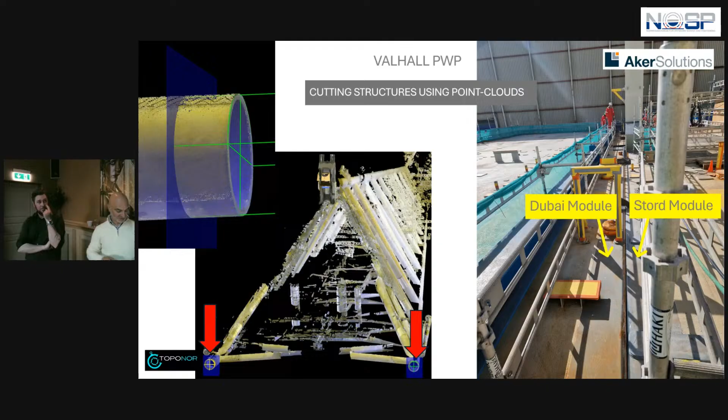Yeah, good, I think we are way out of time now, so I'm gonna just pass it over. This is other things we use the scan for in Aker Solutions Stord, on the floor or on the ground, just leveling out the ground basically.

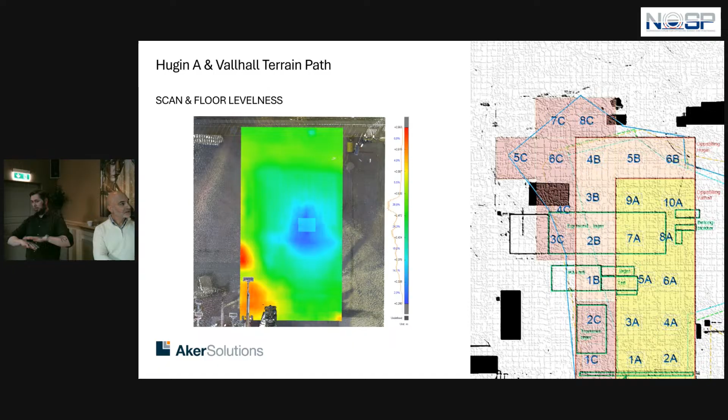Since we're talking about millimeters, and you're lifting heavy things, and they will deform, especially when they're big, do you have a model of how much it deforms, or how do you calculate that? How do you bring that into the lift calculation?

We have discussed it. Can we actually calculate, let's say, an ellipse or something? Because we know that if you can calculate the weight of the thing and where you're anchoring all the points and everything, you can basically calculate a theoretical ellipse on it.

The time to do this before the lifting, we don't have. You can kind of plan that we are going to install this volume of pipes, and then you can calculate the weight. But then you have some changes happening like a week before or something. Okay, we are focusing on this instead. And then you're basically back on ground again.

So we have discussed it, we have not yet done it, but I do believe it's possible to do, just not in the time limit we have right now.